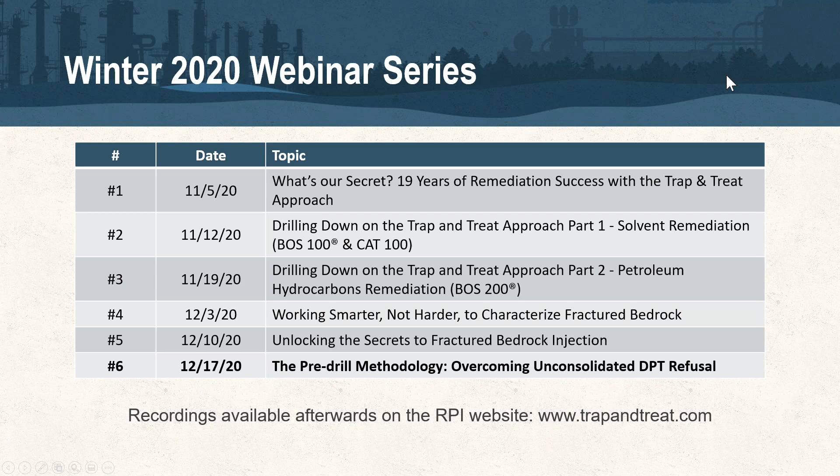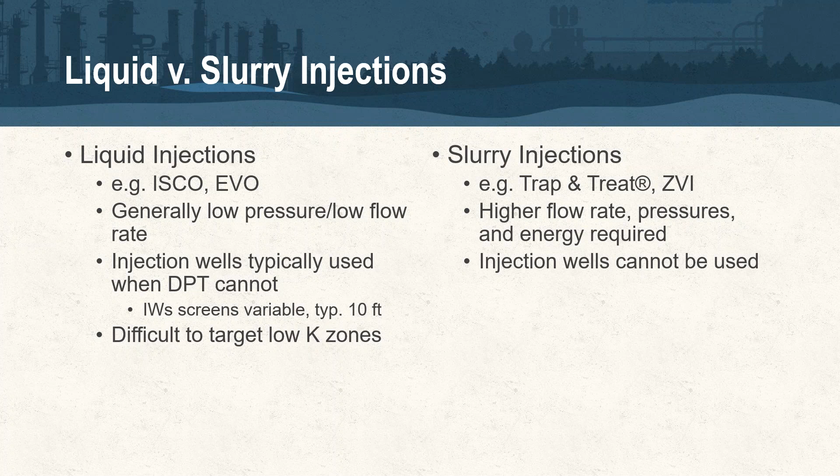And what came out of that is what we call the pre-drill technique that we'll be covering here in a few minutes. And so I'm not going to get into these individual technologies here today. I just wanted to throw this up here because they are going to be referenced when we get to the project summary section. So BOS 100, CAT 100, these technologies are used primarily for chlorinated solvents. It's what you would think of in a traditional granular activated carbon. Down at the bottom, BOS 200 and 200 plus are used primarily for petroleum hydrocarbons, and that's more of a powdered activated carbon.

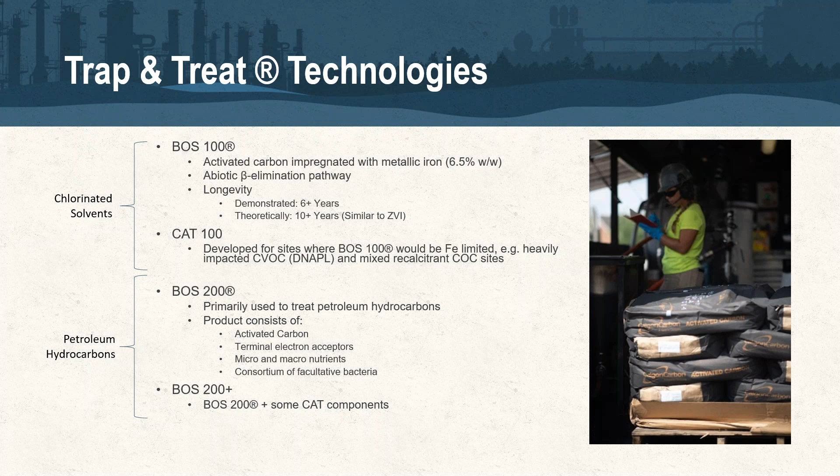All right, so these are the four main techniques that we use to get these technologies in the subsurface. So the vast majority of our projects are going to be traditional direct push, where we don't get refusal. Say top-down injections. We like top-down, whether it's pre-drill or whether it's traditional direct push, just because you're pushing down into native material.

Bottom up, I don't think is a good practice for most applications, because especially when you're in something fine grained, as you're drawing that injection tip up and you're pulling your rod string out in a bottom up fashion, you're leaving a void below that rod string. And I think a lot of times you do get bypassed down into that lower borehole that you've just vacated. So you alleviate that as an issue when you use the top down manner.

And your variables there, so whether you're in a clay or sand, for example, might be your injection volume. Maybe your injection tip is actually going to change. We change those quite a bit as well, depending on the lithology, and try to match them up as best we can. I'm gonna skip over pre-drill and then I'll come back to it.

Bedrock: if you've got fractured bedrock sites, I encourage you to download or listen to the webinars that my colleagues gave in the first week and the second week in December on characterizing and injecting into fractured bedrock. Bedrock applications, as well as these pre-drill applications, are some of our growing markets at AST, and I think that's because we're left with a lot of these really difficult sites where maybe the shallow mass has been dug up or it's been dealt with using other technologies.

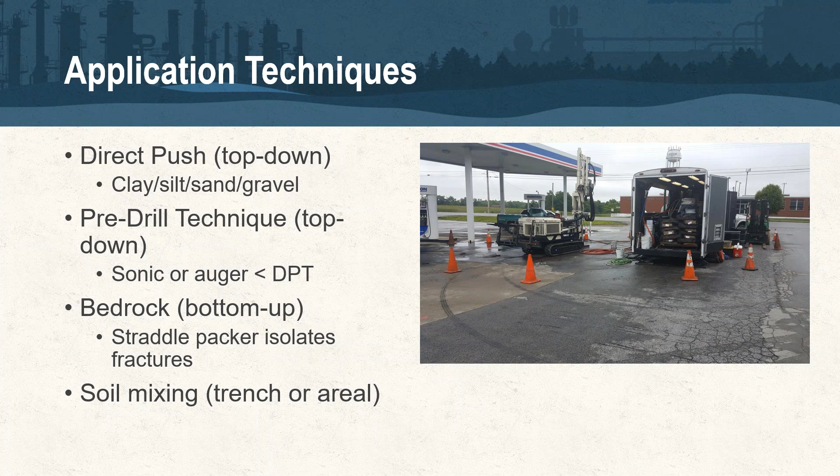So here's an example of just a standard direct push setup out on a gas station. This is the pre-drill out on a site. This is actually the third project summary that I'll get into. This is Shaw Air Force Base down in South Carolina, using the Geoprobe sonic to pre-clear those holes. Went down over 170 feet on that particular site.

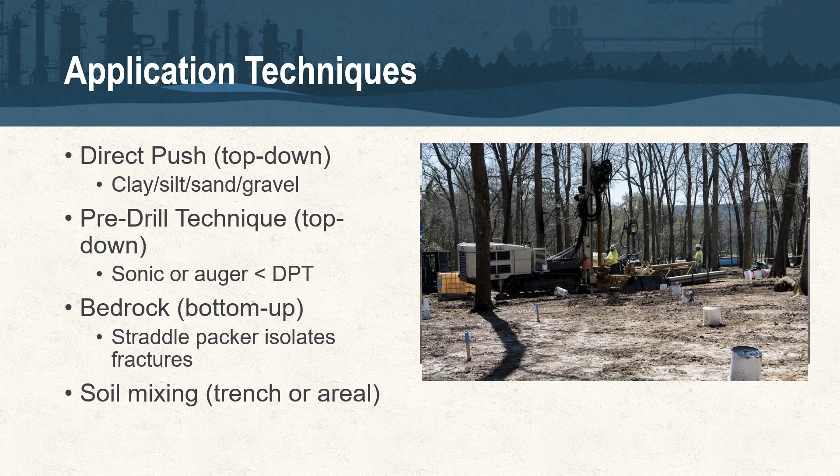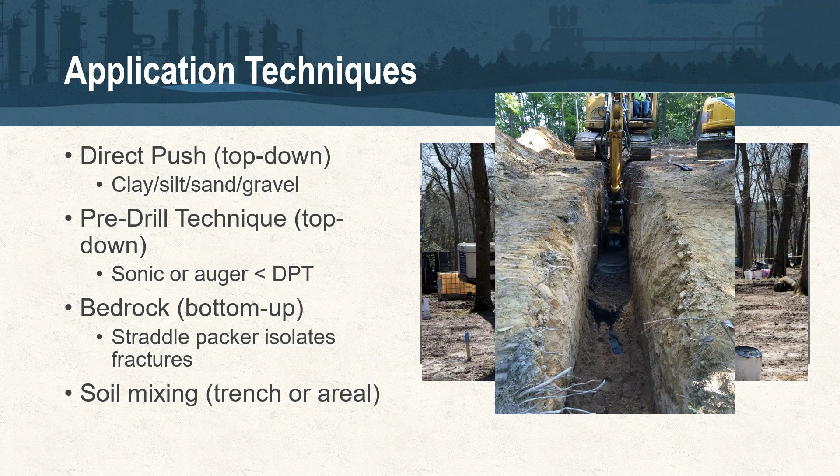All right, so all of these presentations that talk about injection techniques have the same common element, and they talk about contact, right? Contact being critical and king for these applications. And it really is true. Especially with slurries, once that injection energy dissipates, the injectate isn't going to move, which is what you want for most applications. If you're putting a PRB in, you wouldn't want to put something in that's going to be mobile, right? You want it to stay in place.

And so, as we've talked about, DPT by itself and packers are not always options. That's why we're here today. And injection wells: if you're looking at slurry-based technologies, injection wells aren't an option. And if you are looking at more solution-based injectates, use that HRSC process that's been referenced in previous webinars to really ID where your mass is, where it sits in that vertical column, because if it is tied up in those lower permeability zones, it might be difficult to treat with injection wells.

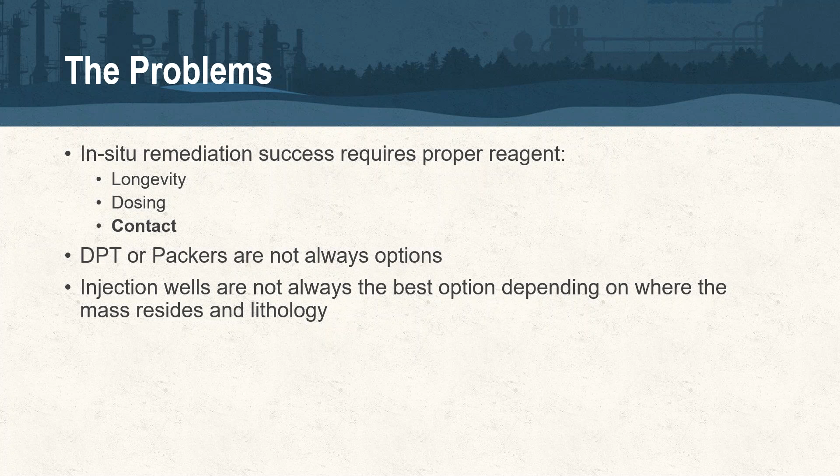The first project summary that I'm going to show you is actually a historic fill situation. And so again, it's pretty simple. We're going to be advancing, say, augers or sonic down to our total depth. We're going to backfill with bentonite. It's a really detailed procedure. You want to do it in pretty tight lifts. Make sure it's hydrated well. And usually we let it sit about 24 to 48 hours on the minimum end before we come out to re-drill that location with direct push. So our injection fluids cut through that bentonite and get into the native lithology.

One of the main questions we get is, are you just going to have a giant tube of toothpaste and you're squeezing all this bentonite out of the top? The one caution is we haven't used this technique on really shallow applications. If we're going to be using this at, say, less than 10 feet, we really haven't used that, or at least not that I'm aware of. So most of these applications are deeper. That is the one caveat. But if you think about it, what's coming out of these injection tips looks like a pressure washer, and it's going to slice right through that bentonite and get out into the native material.

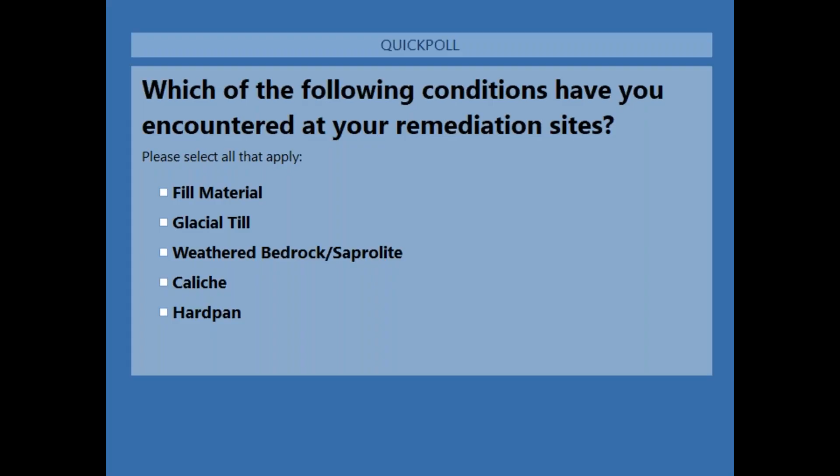So I'm going to go ahead and pull up our second poll here. This is our second and last poll, so go ahead and click the different situations where you have gotten refusal. All right, most of you have voted. We're at about a minute, so I'm going to close that out. You can see the results there. A lot of you have fill material, weathered bedrock / saprolite. Glacial till, we're all over 50%, hard pan close to it, and then caliche about 27%. So again, thank you for those responses.

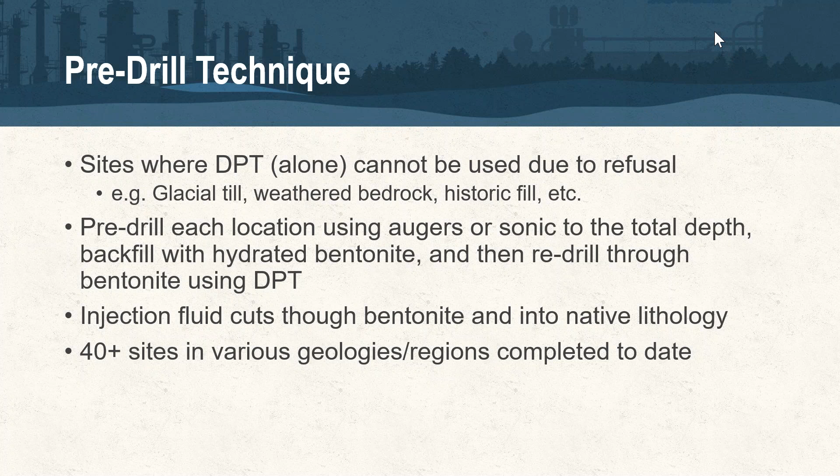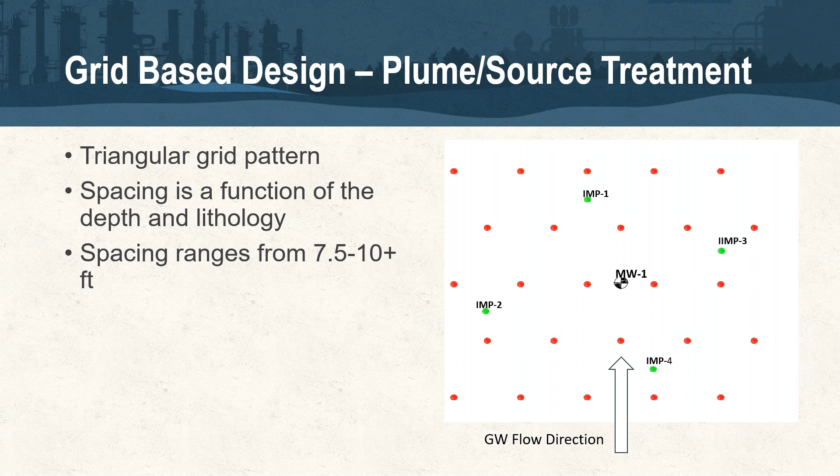Everything's the same from an injection point layout standpoint. We use triangular grid patterns when we're doing source or plume treatment. Spacing is usually 7.5 to 10 feet on center. For PRBs, very much the same, 3 to 5 injection rows with 7.5 to 10 feet on center as well. Depending on the site, the shallower we are, the tighter the spacing is; the deeper we are, spacing can be relaxed a little bit.

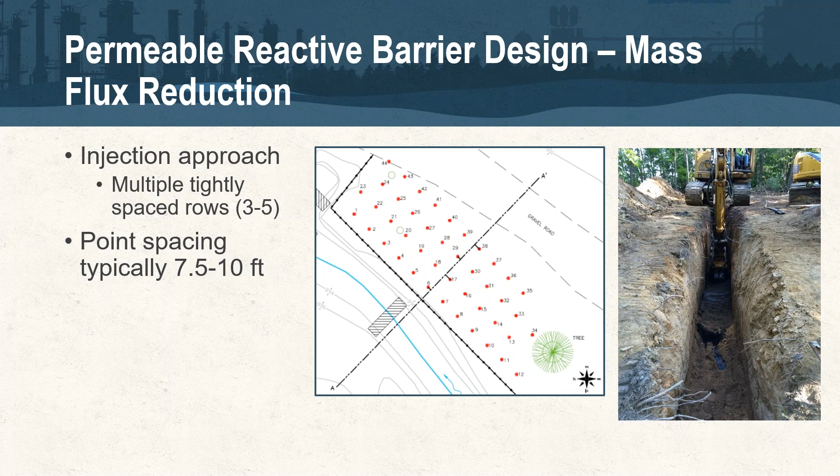All right, so we'll go ahead and jump into the summaries here.

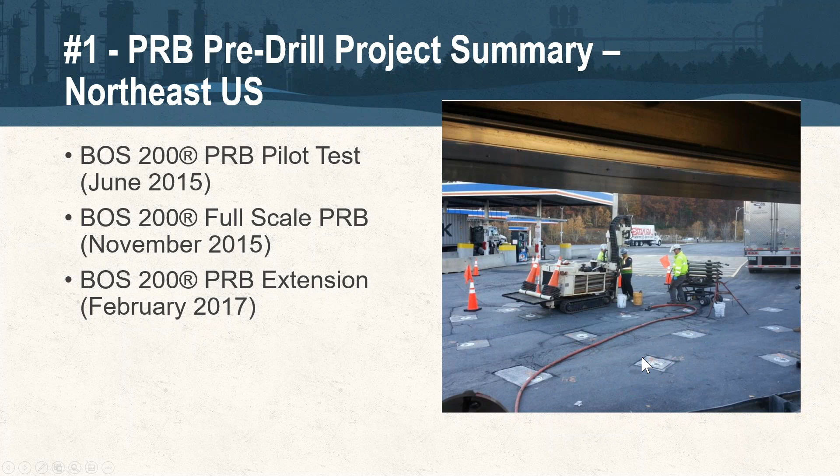All right, so it's a rest stop up in the Northeast, and when this area was being brought up to grade, they brought it up to grade with a lot of construction debris and blast rubble, and so not very direct push friendly. And the goal was to set up a PRB to protect this wetlands that sits to the north on the down gradient side of our barrier. So each location was pre-drilled by our client using sonic down to competent bedrock.

And one note when we get into looking at the data for this site, this is our up gradient well, MW204. This well here, MW205, was our original compliance well, or our down gradient well. And it's where we did our pilot test, but it got consumed by the full scale whenever we did that. So that got abandoned, and our client installed MW207. So whenever I show you the data, this is our early data for the site, and this is our long-term monitoring well. So it was about 150 feet long, 88 injection locations on an approximate 7.5 foot spacing.

The injection interval varied quite a bit. The contour of the bedrock varied, as you can see, from 26... Total depth was between 34 to 57 feet BGS, which is where bedrock was encountered. And the P, Q, V, so pressure, flow rate, and volume, to give you an idea of what the injection pressures looked like, what the injection flow rate looked like, and what that volume looked like per interval.

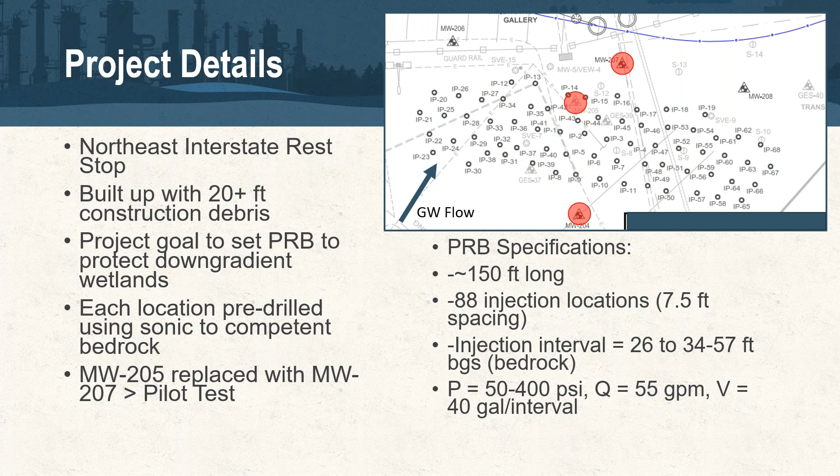So the only caution I would have is if you're going to go out and do that and it's been sitting there for a while, you may have to come out with a larger direct push unit than you originally came out with, just because that bentonite has set up a little bit.

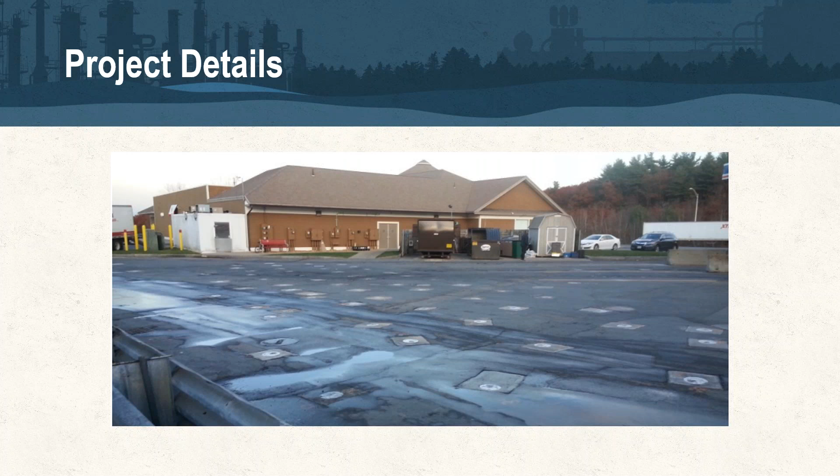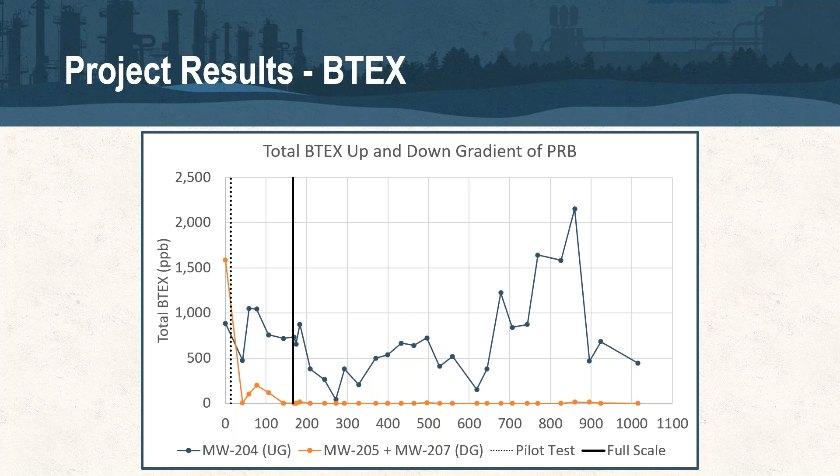Second site, this is a chlorinated site. This is also another site that I was involved in. So this is a former Atlas site that's in Nebraska, and so we were looking at a suspected DNAPL area around what you'll see on the map here. I'll show you in a second. It's MW18, really high TCE in groundwater, but a very localized area.

And so we were looking at a perched groundwater table, which was around 50 feet BGS. It was a low plasticity clay till with shallow DPT refusal, which is why it got converted to a pre-drill project. And we were looking at pilot testing, so it was a relatively small project, but it was looking to pilot test BOS 100 for delivery, but also effectiveness in this area.

And so I really haven't gotten into the RDC process in this presentation. It's been referenced in previous presentations that we've given. That's just our CSM refinement step of doing some high density soil and groundwater sampling to be able to refine our design.

And so out on this site, we installed 4 monitoring wells, 1 CMT, that's the multi-channel well. So we installed 7 channels from 22 to 70 feet. And we sampled every 2 feet vertically at all these locations. So we sent about 115 soil samples to the RPI Project Support Laboratory.

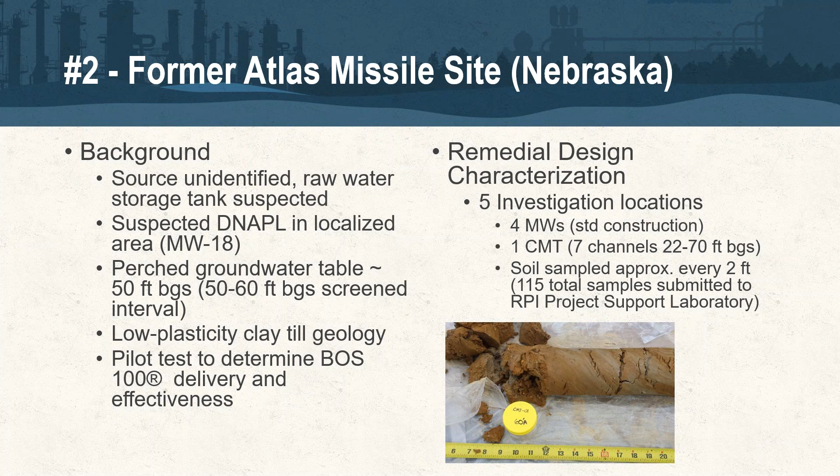All right, so this was our injection layout. So we had different spacing, 5, 7.5, and 10-foot spacing, depending on where we were. Total of 21 injection locations. So we used hollow stem augers to do our pre-drill. So 14 of our 21 points went down to 70 feet, and we had 7 points go down to 54 feet BGS, and about 7,500 pounds of BOS 100 were injected in April of 2016.

And so the pilot test, you'll see we had a bunch of samples right after we completed the pilot test, which is the dashed vertical line. And that's all the sampling that was included in the pilot test scope of work. And so the site sat for a while, and we did get another sample late last year. And we were able to show we got about a 99.4% reduction at 1,300 days from our pre-injection RDC baseline concentration. So we have about 88,000 ppb of TCE baseline.

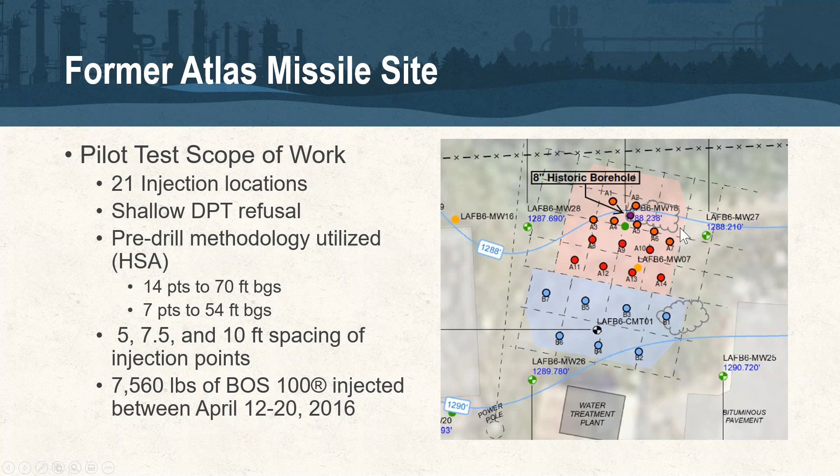And MW 27 and 28, so go back to the map, these are the wells that are on either side of our injection area. So they were outside our target area, but you can see that we did have some influence there, between 46 and 90% reduction. Those wells are really on the outside of our ROI. We did see some hydraulic influence there, but they weren't the focus of the pilot test. That was really MW 18. But we did see some areal effects outside of the pilot test area.

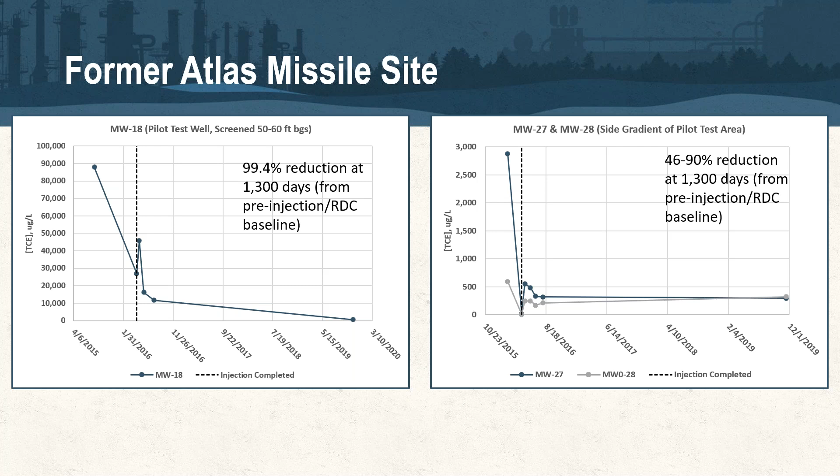All right, lastly, wrap up here with this project at Shaw Air Force Base. I already mentioned this earlier in the presentation in one of the photos that I showed. So this project had 2 phases to it. The first one was really that RDC phase that I mentioned in the previous project. It was just plume and CSM refinement to really update the design, the vertical and horizontal extent, and that was done in early to late 2018.

And then later that year, 2018, up and through early 2019, we came out and installed a 650-foot BOS 100 PRB that was installed, depending on where you were out on the PRB, 90 to 167 feet. So this represents our deepest pre-drill application. So we used Sonic out there to pre-drill 130 injection points down to those total depths, and about 60,000 pounds of BOS 100 was applied through those pre-drilled locations.

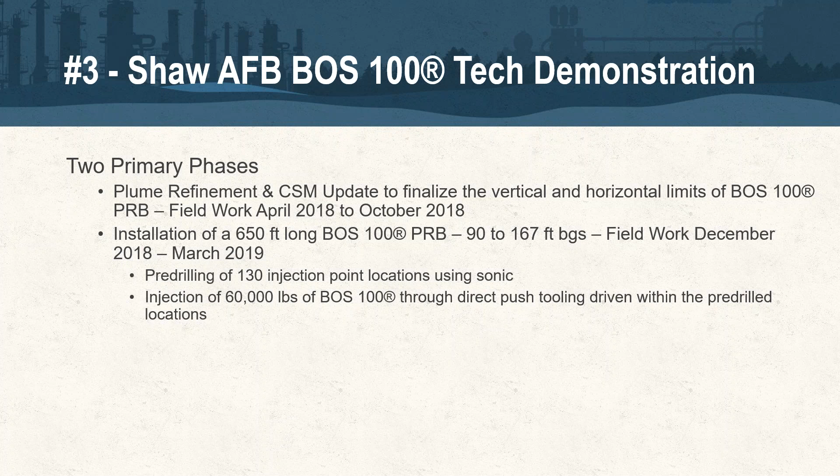And so, as you can see, as the topography drops here north to south, down in the southern end of the PRB, the injection intervals were shallower, so 90 to 122 feet BGS. And on the northern side, where the slope comes up here, we were deeper, 135 to about 165, 167 feet BGS. And so we were injecting the top 30 feet on top of this 100-foot clay in this upper Black Creek aquifer.

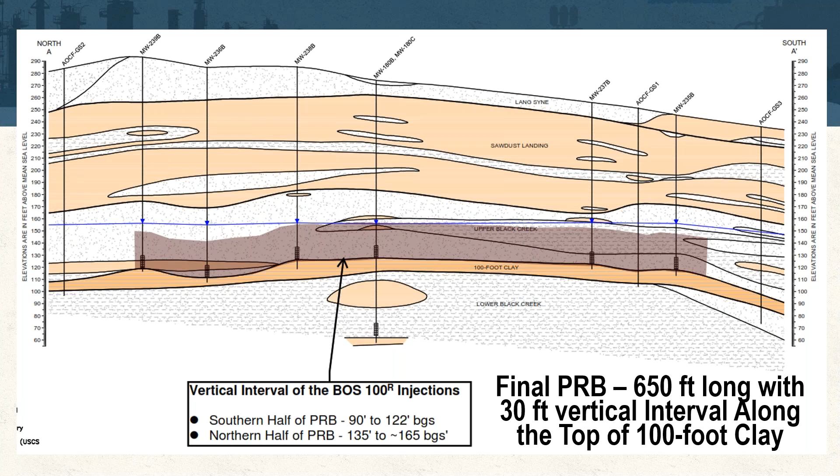Okay, so I mentioned 130 points. So just logistically, we had 2 rigs out there that were operating simultaneously with the injection activities. So what we usually do when we're on a large site like this is we'll get the Sonic rigs out there a few days ahead of us, let them get some points done, and then we start coming in behind them. So there was full logging on 10% of those locations, and there were samples collected from the bottom 30 feet. Those go into the RPI laboratory.

And on most shallow sites, we're using bentonite for the total span of our boring. But on this site, because of the depth, we filled the bottom 70 feet with bentonite pellets and the balance with a 30% bentonite grout.

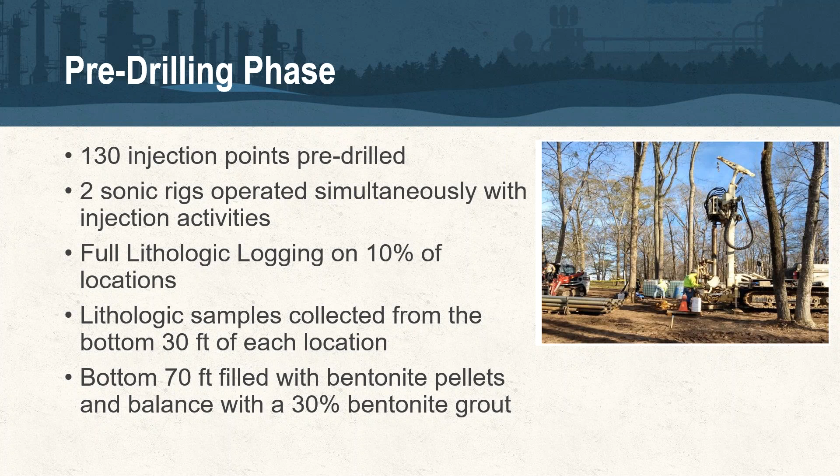And so here's us doing the actual injection phase. So again, about 60,000 pounds of BOS 100 was injected into that UBC unit. And again, it's on the upper end. The shallowest end was 90 feet, deepest was 167 feet. We were using 2¼ inch rods to inject in that bottom 30 feet.

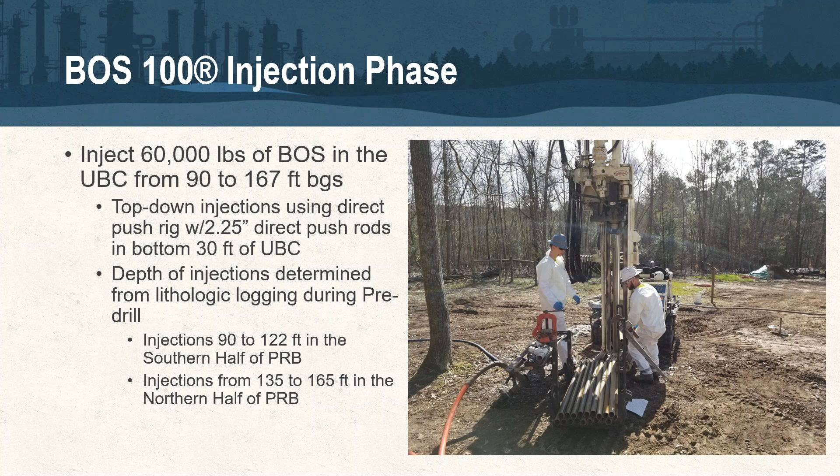And here's some photos from the project. And I think we're about 35 minutes in, which is right on schedule for this.